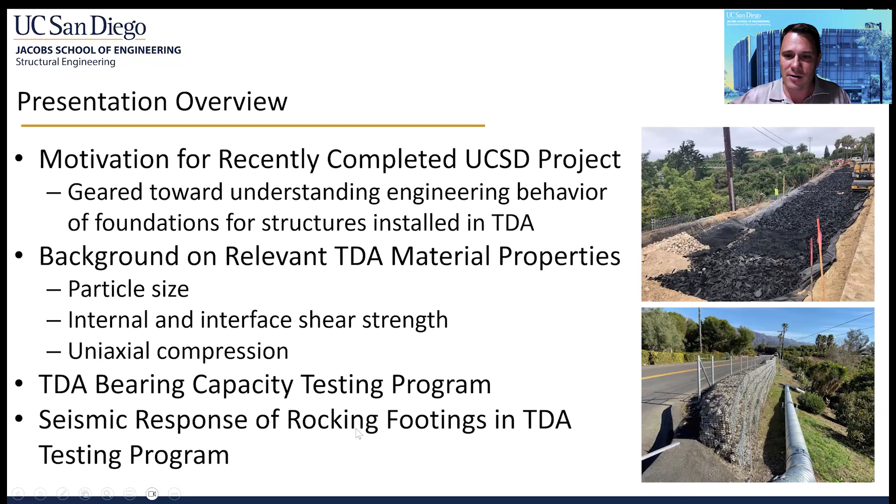I'll talk a little bit about what sort of structures would be installed in the TDA in a second. But before I go through some of the detailed results from our testing program, I'll tell you a little bit about TDA material properties and how we can use those material properties together with some theories to predict the behavior of the foundations. Then I'll go through some details of our bearing capacity testing program - this is basically how much can you load your foundation installed in the TDA - and then a seismic response testing program to understand how a foundation would behave if the ground was shaking below the TDA layer.

So the project had two phases, as I mentioned. The first is where we looked at the load settlement response of footings installed within the TDA. We did 8 different experiments where we changed the width of the concrete footing, the shape of the footing, the angle of our load. But in all of these cases, the foundation is going to push down into the TDA, and at some point it's either going to tilt sideways or reach a capacity value. And then we want to take the measurements that we had from those experiments and compare them with some theories that geotechnical engineers use to predict the bearing capacity of foundations in soils. We want to see if those apply also to TDA.

Our second phase, we wanted to look at the seismic response of the footings in TDA. So this is a very interesting future application.

I think that this has a lot of potential for TDA. TDA is used as a vibration isolation layer in railways right now, but maybe we can also use this as a way to mitigate the effects of earthquakes on structures by providing a low-cost seismic isolation system. We have seismic isolation systems we can buy from companies that cost hundreds of thousands of dollars. So if we're able to use this recycled lightweight TDA, it's very low cost for, as we'll see, almost comparable performance.

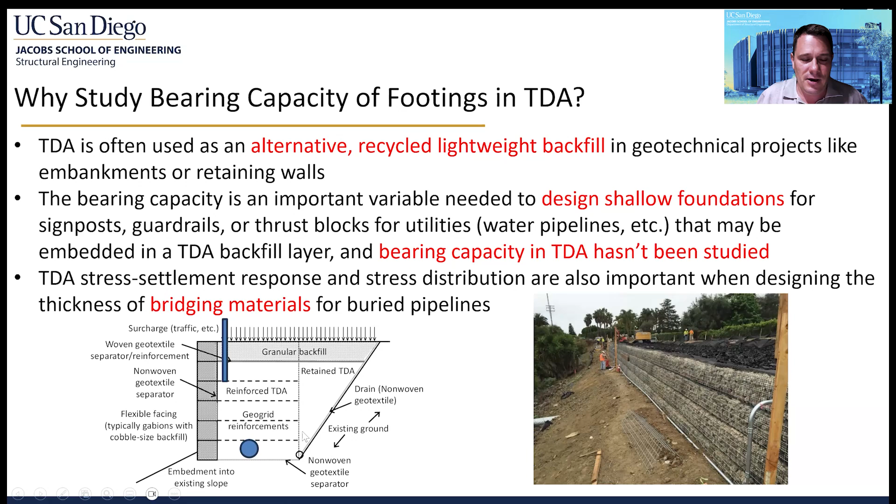Another interesting thing on why we want to study the seismic response of footings in TDA: if we have a shallow footing on soil and we design the footing to be very large so that it would have a very high bearing capacity, one challenge during the earthquake is that the energy could be pushed from the ground into the structure, and you could end up having a failure within the concrete structure.

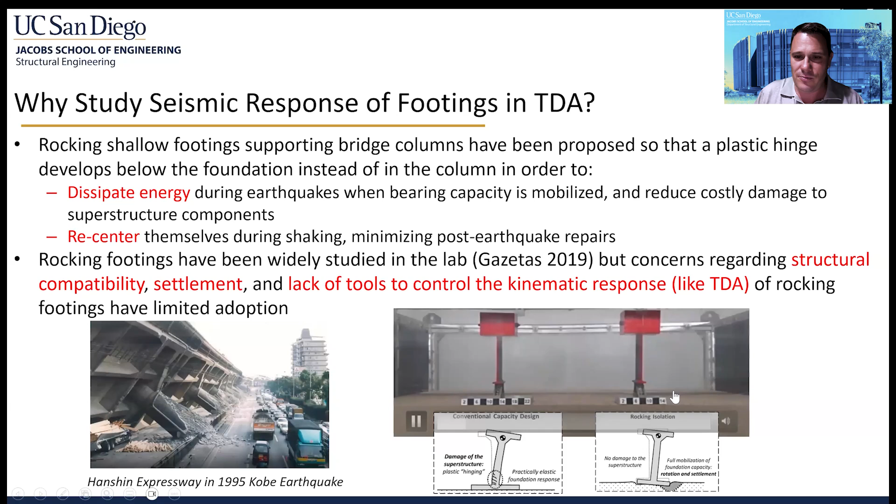So this was something that we wanted to study. People have looked at these rocking foundations on soils, but there are still a lack of tools to control the behavior of these rocking foundations. So if we can use TDA beneath this rocking footing, we may be able to gain even better response than people have seen in the past. I'll show some actual experiments on TDA instead of sand, as you can see here.

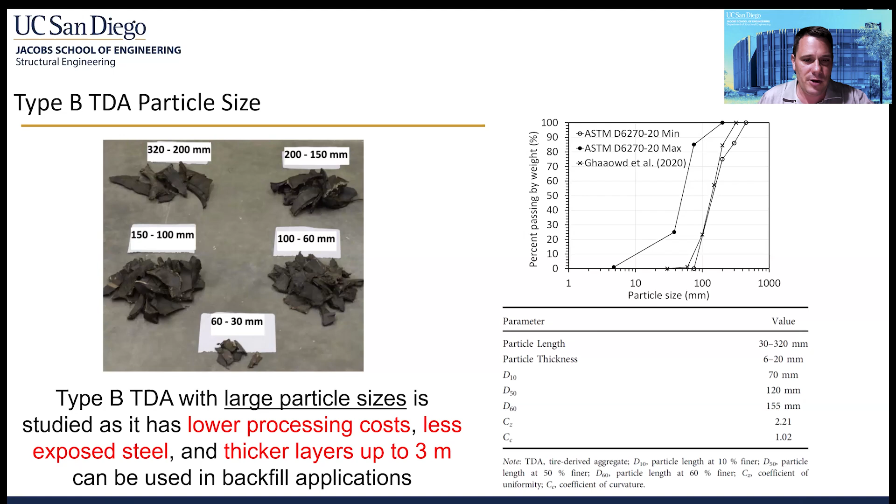Before we go into talking about our experimental program, I wanted to give you a little background on TDA and some of its properties that we've measured in previous projects sponsored by CalRecycle. We're focused on type B TDA, with large particle sizes up to 1 foot in one dimension. This has lower processing cost, less exposed steel, and because of those, you can use thicker layers up to 3 meters, or 10 feet. And that's advantageous in our geotechnical applications.

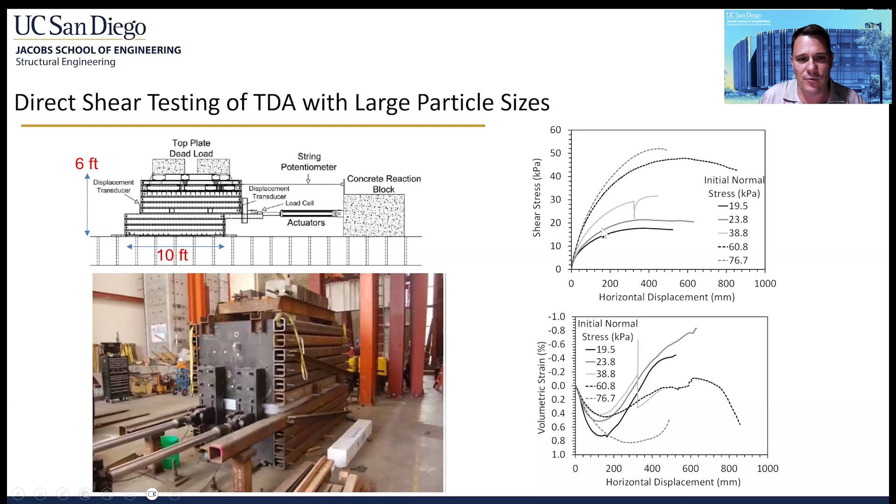Whenever you have big particles, you need to have big testing devices. So one of our early projects was to develop a large direct shear box to measure the shear strength properties. Once we did this, we found that the properties of TDA are very similar to those of soil, but with the main exception that it takes a lot of movement before you reach the strength of the soil. The strength is where this curve reaches its peak. You're almost getting half a meter of displacement before you get to the peak. So there's good things about that. It's a very strong material, but it's very flexible.

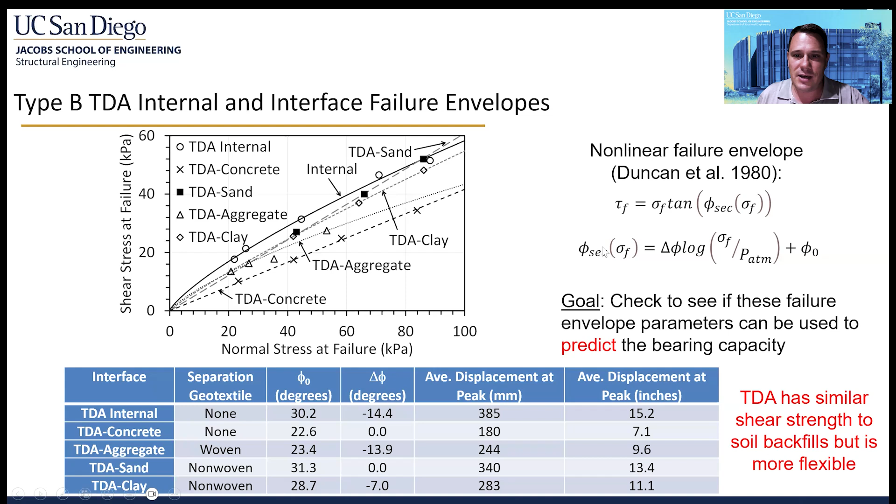These are just some different failure envelopes telling you what the strength at failure is versus how much load is on the TDA. Our goal was to take the parameters of these failure envelopes that we developed in a previous study. It gives us something called the friction angle. And we want to see if we put that friction angle into some predictive designs, is it going to give us the same bearing capacity that we're measuring?

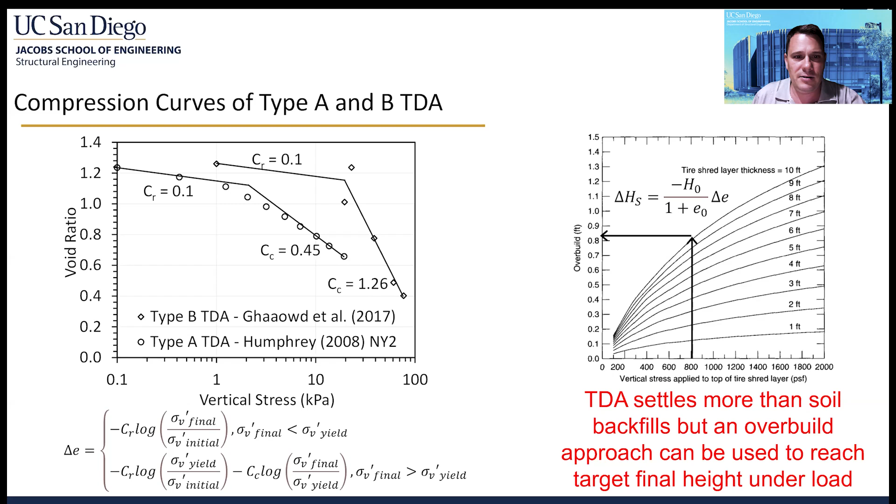Okay, now onto our bearing capacity testing program. We repurposed some large concrete blocks that we had in our lab to create a big box that was basically 10 foot by 18 foot in length.

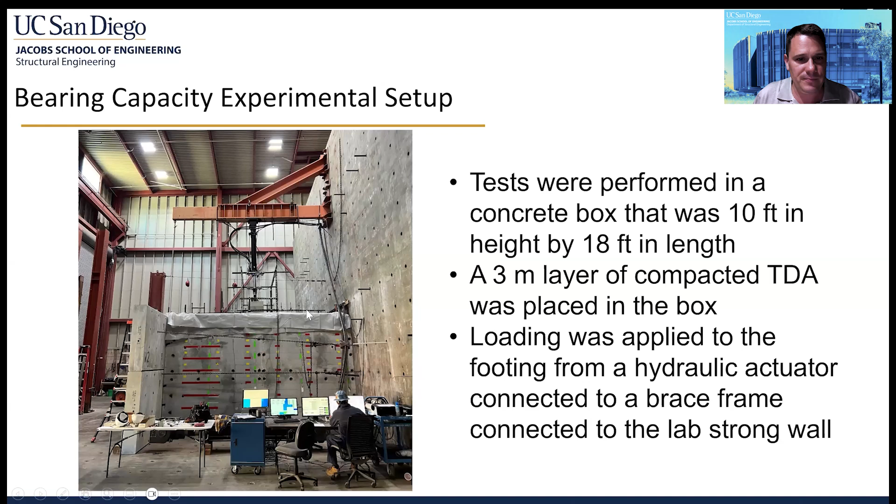And we were able to put 10 feet, or 3 meters, of TDA within that. You can see a person sitting here for scale. And then we had a loading frame, and we could apply loads through a hydraulic actuator to a footing. This is just a picture of the TDA that's been installed into the box, and we used a bobcat to compact it into place. It's not the same as you do in the field, but it's as good as we could get.

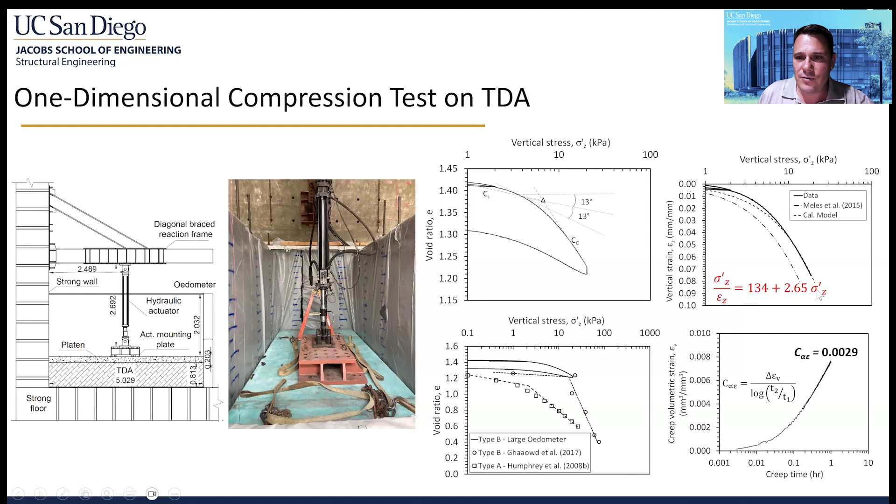We did some early tests before we had all of the TDA needed to fill the box, where we just squished the TDA and made some comparisons with our previous direct shear test measurements, and we saw that we could get a very nice hyperbolic curve to represent the load settlement response.

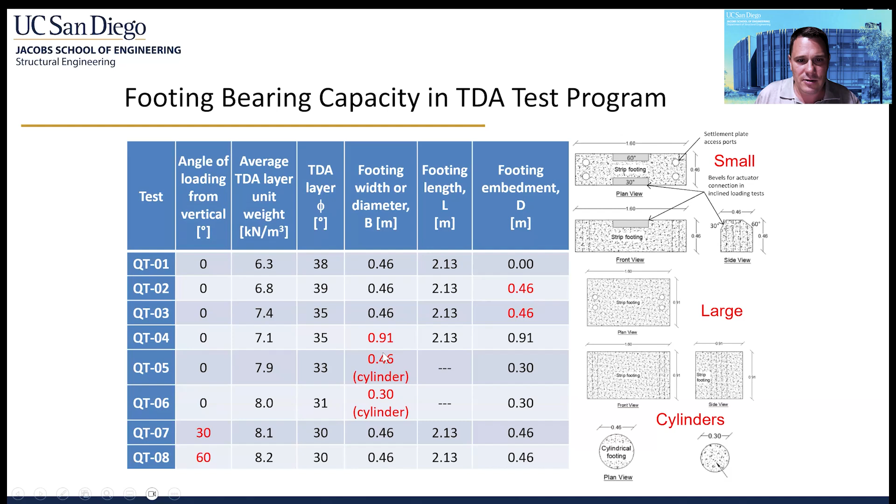Here's a summary of the 8 tests that we did. We varied the embedment depth, the size of the footing, the shape of the footing, and the angle of loading. Those are all different things that you may encounter in different projects.

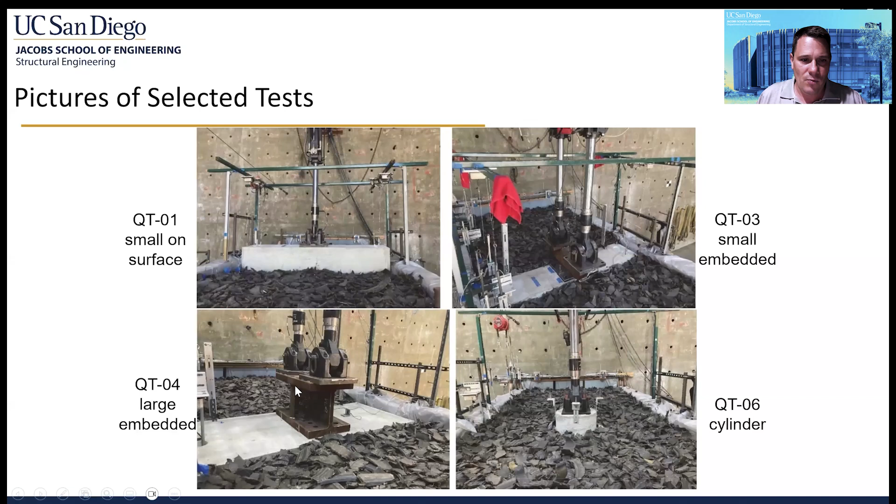These are some different pictures of the different footings. You can see it's a strip footing for most of the cases that we looked at. It was on the surface, it was embedded into the TDA, a wider footing, cylindrical footings that you may encounter for those signposts or guardrails, and then inclined loading, where we applied loads at different angles.

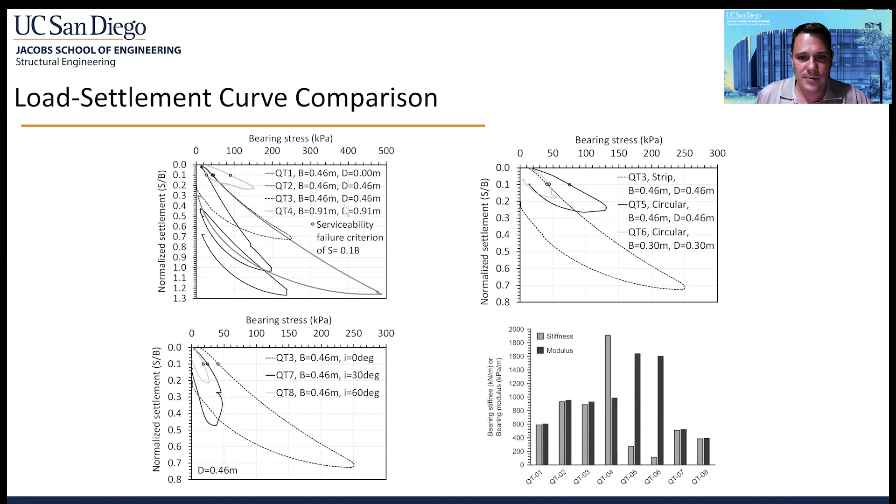So we did reach bearing capacity failure in many of those cases, but it may not be good from an engineering perspective to go all the way out to bearing capacity. We may want to define a settlement criteria, like these dots here, that says we can define failure at the point where you've reached 10% of your footing width. I'll talk about that on the next slide.

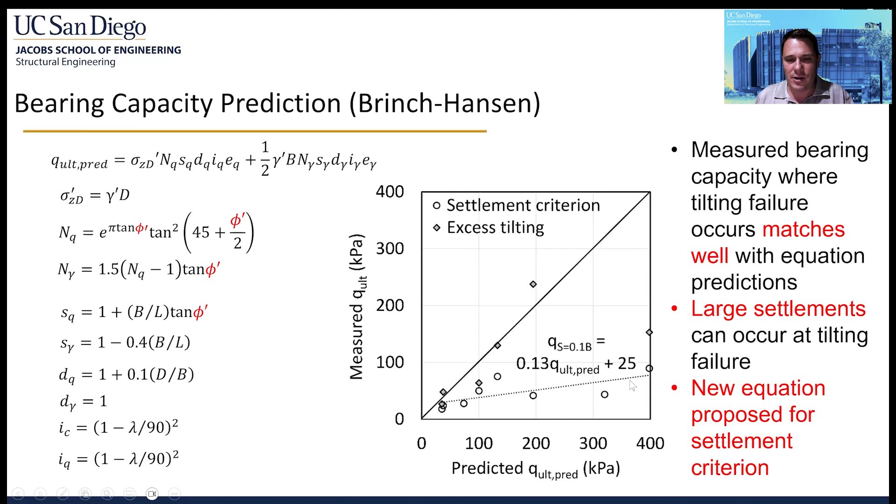So we came up with a new equation that correlated the predicted value with the bearing capacity at 10% of the footing width. And we can use this correlation in design to give us a bearing capacity that is also going to lead to small settlements.

Okay, so that's it on the brief overview of the static bearing capacity tests. Now moving on to the seismic testing that we performed on the footings in TDA.

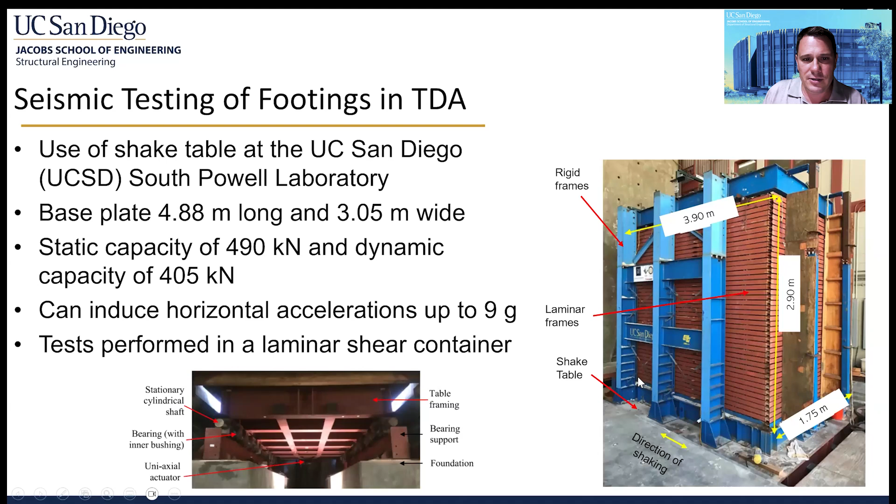We have multiple different shake tables at UCSD. If you're interested to come visit, there's a lot of cool facilities there. We used our medium-sized table in the Powell laboratory that can accommodate this large laminar container. It's about 3 meters tall, about 4 meters long and 1.75 meters wide. We can fill that with TDA to different depths and put a footing into it in a configuration you can see like this.

We did 3 tests with different layer thicknesses and different A over AC values. If you decrease the width of your footing, like I showed in that early video, your area is going to be getting smaller. Depending on the characteristics of your mass, you're going to have a critical ratio at which overturning is expected. So if you look at that ratio, it's basically another way to look at the factor of safety. A smaller value is more dangerous and a larger value is safer. I'm going to show you the results of this bottom test, which had the lowest value of A over AC.

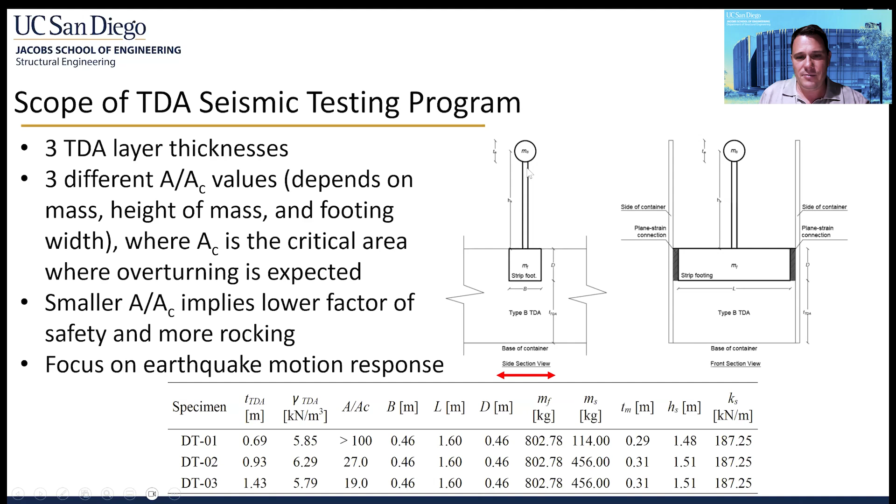And we shake it in this direction, and there's basically a lollipop that is rocking back and forth on top of the TDA layer.

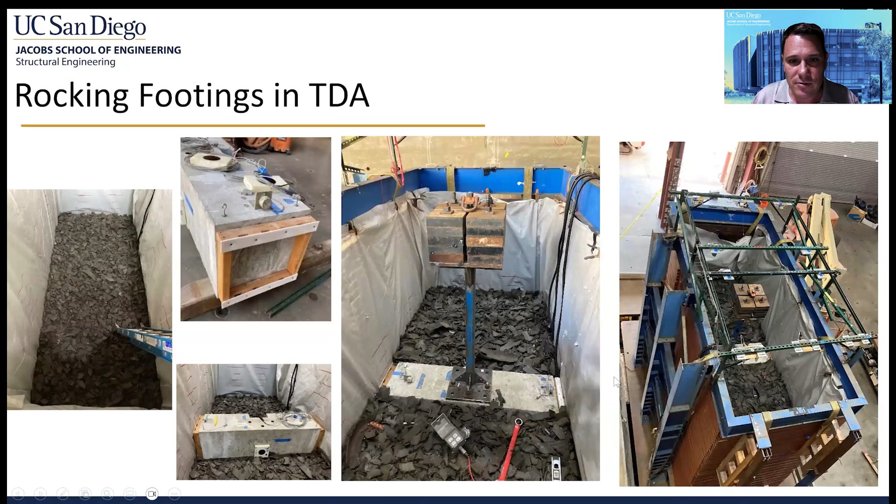So again, we had our container, we filled it with TDA. We had one of the footings from the previous test and put it into the TDA layer and filled it up to the top of the footing, and then had this stack of weights on top representing our structure. I'll show a video on this slide. This may be, hopefully it's not too loud.

The main thing you can notice from that test is that the footing comes back to where it was at the beginning of the test, which is very good. That's an indication of good recentering. You can see that there was not really any more settlement during the shaking event. When we first load TDA, we can expect relatively large amounts of settlement, but after that it's relatively stable, and we don't see a large amount of settlement during shaking.

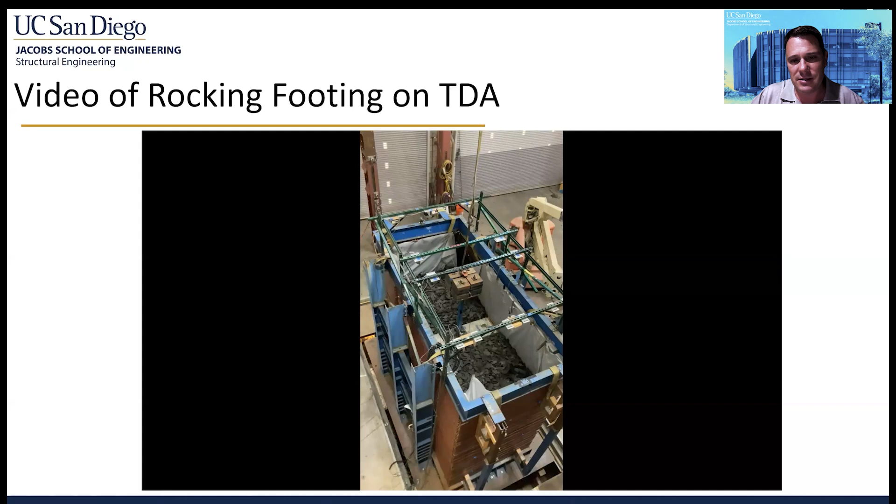Our results also indicate that there's a large amount of energy dissipation. That means the energy from the earthquake is being dissipated in this rocking mechanism, and it's not causing failure within the structure. So that's what's being shown on some of these plots here.

The blue, black, and green are soil rocking foundation tests. The red is our TDA. It has lower amounts of settlement than all of these other cases, although we do have a little bit more rotation, so that's an issue. You saw the mass was moving a little bit more back and forth.

The damping ratios for the system are relatively similar, but there's an increasing trend. So the more rocking that you have, the more energy is being dissipated.

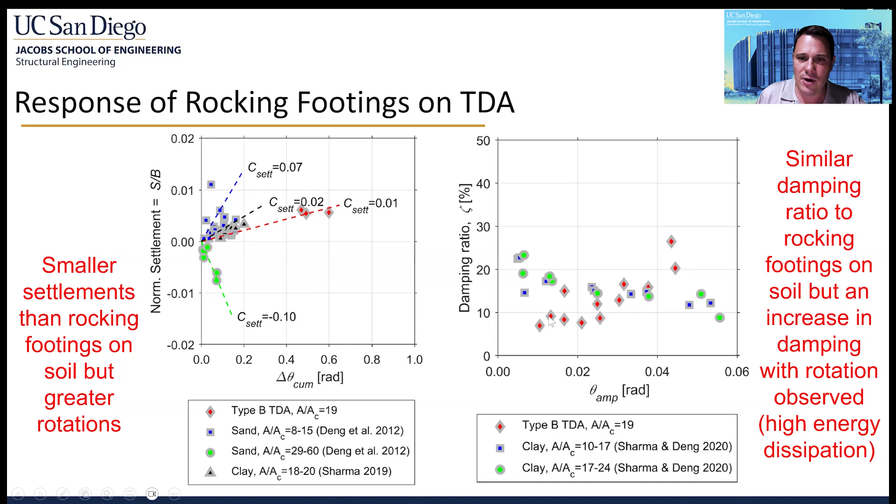We can also look at the loops of stress versus strain and come up with some different ratios. I won't go into a lot of detail here, but the bigger the size of this loop, the more energy is being dissipated, which is good for protecting the overlying superstructure. And we have a recentering metric, which tells you how well you come back to center.

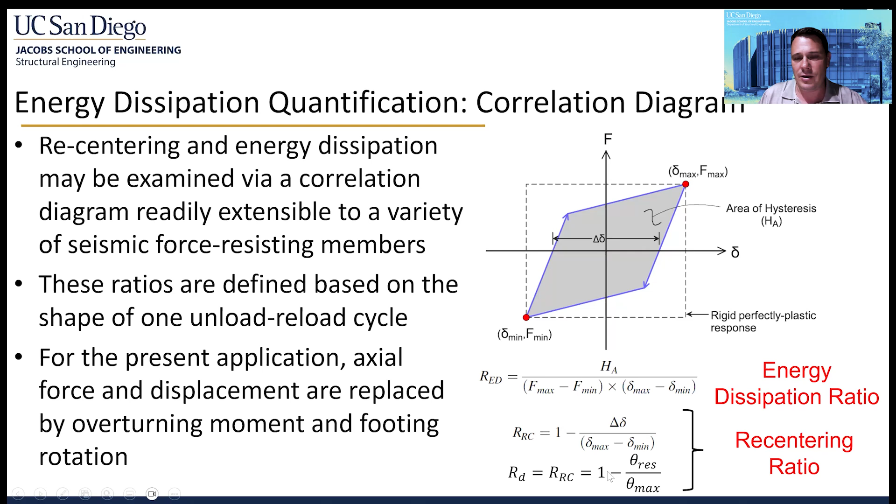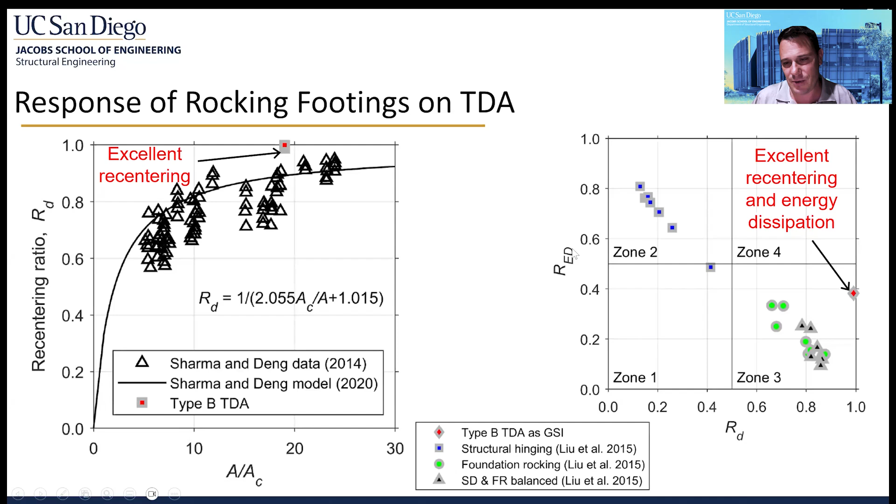One good thing is if we compare these results from soils in the triangle and our TDA in red, we have very, very good recentering, almost perfect. This plot on the right shows that we again have very good recentering, but also pretty good energy dissipation. In soils, you need to have some amount of poor recentering in order to have energy dissipation. But that's not the case in the TDA, which is a very positive sign.

So I have about a minute.

In our bearing capacity tests, we found that there were relatively large settlements by the time we were able to get to our bearing capacity. One nice thing is that we had a good match between our experimental results and our theoretical bearing capacity predictions. The only issue is that large settlements are needed to reach the failure criterion. So we came up with a design equation that can be used so you can know what the bearing capacity is while not having a large amount of settlement.

I think hopefully from that video you can see that TDA has good potential for providing geotechnical seismic isolation, as long as you're able to accommodate the rotations that could potentially happen in the superstructure, or maybe add some additional features into the TDA, such as reinforcement to help control the amount of rotations that you obtain.

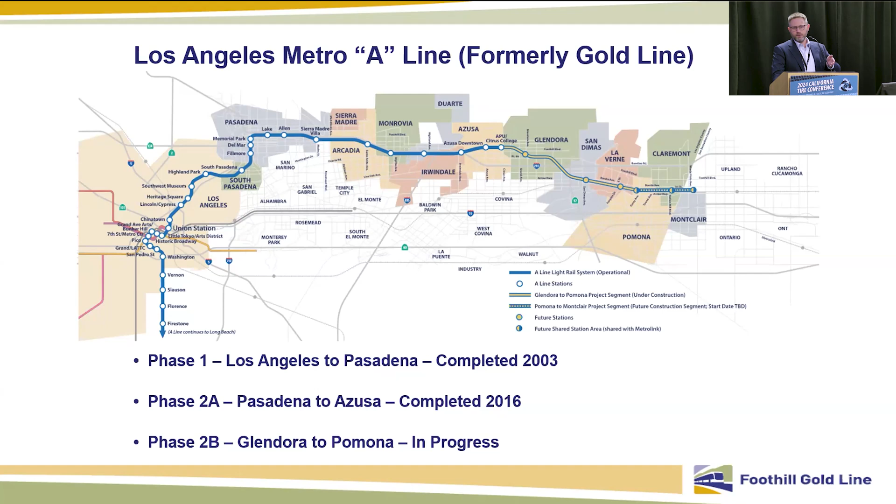I'm the contract manager for the Metro Gold Line Foothill Extension Construction Authority. So what are we? We are a state agency, we're not LA Metro. We are a state agency created under an assembly bill back in 1998 to build what is now the northern leg of the Metro A Line, what at the time was the Metro Gold Line, from Union Station initially to Pasadena. Then under a separate state assembly bill in 2011, the authority's charge was expanded to extend that line. So between 2012 and 2016, we extended the line from its original terminus in Pasadena to the Azusa-Glendora border, and we are currently constructing what we call Phase 2B, from Glendora through San Dimas, La Verne, and Pomona. And we are in the process of securing funding for a further extension from its current planned terminus in Pomona through the remainder of Pomona, Claremont, and then across the county line to Montclair in San Bernardino County. So let me go back here.

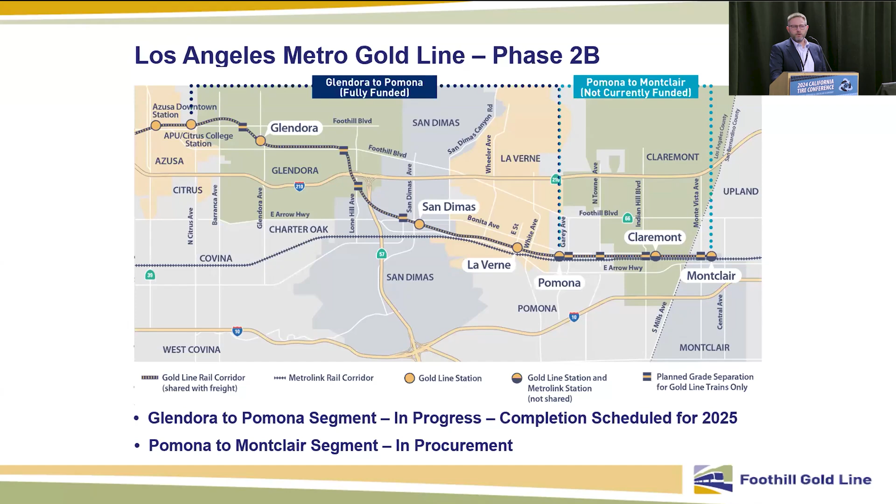So the segment we're currently building, Phase 2B, is about 9.1 miles. It's double-track light rail. We're building on a right-of-way that is occupied by a freight line, so we've moved the freight line from the middle of the right-of-way, either north or south, to the edge of the right-of-way, and in the vacant space we plop 2 light rail tracks. So all of that said and done, we're building just shy of 100,000 track feet of light rail.

During the environmental phase, we identified 28, almost 29,000 track feet, which needed vibration mitigation because we're putting track closer to a sensitive receptor. Most of that is residential and a little bit of commercial space where we'll have increased vibration from trains being closer to them. Of that, there was one area where we have to install a floating slab, which I'll get into in a minute, where we had a vertical and a horizontal curve next to an existing bridge that we do not want to touch. So we have to put in a floating slab for about 200 track feet, which is a big old expensive pain. And the rest of it, we allowed our design-build contractor to choose whether they could install ballast mat or tire-derived aggregate.

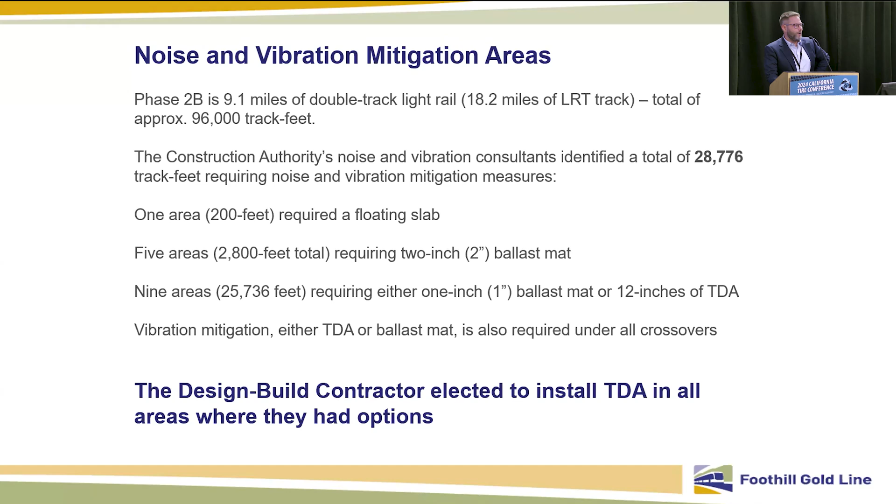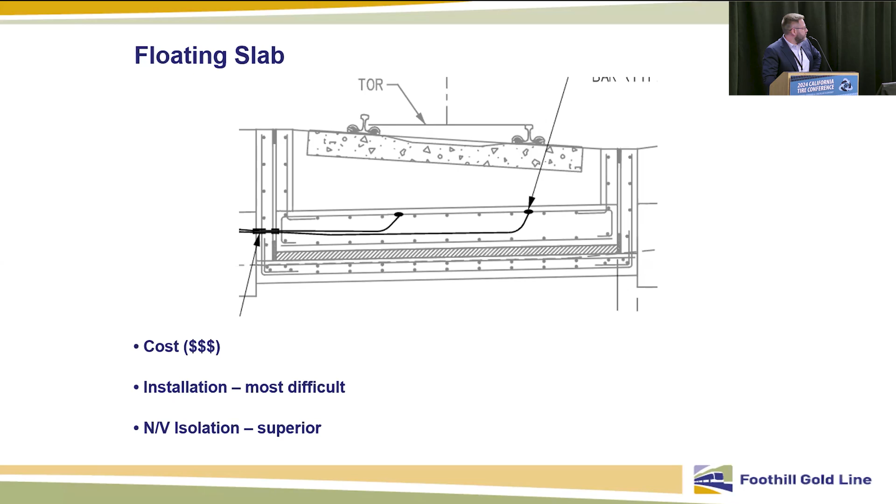So a floating slab—I mentioned this is a big old expensive pain—because what is it? It's really building a trough within a trough. So you have a reinforced concrete trough. I apologize for this graphic, this was the best cross-section I had, but it's a reinforced concrete trough with a layer of vibration attenuation—basically 3 layers of ballast mat—and then another reinforced concrete trough built inside of that, which we then have to put our sub-ballast, ballast, rail, everything on top of. So it's a lot of extra excavation, a lot of steel, a lot of concrete, and we all want to avoid that. It does offer superior noise and vibration mitigation, but it's about somewhere between 10 and 14 times as expensive to build as it is to install just a ballast mat.

Ballast mat is a rubberized polymer mat we place under our sub-ballast, and the material itself is more expensive than TDA. It requires less labor to install on the surface. You buy these mats, you roll them out, but it is delicate.

Generally we are placing between 20 and 25 feet of width underneath our tracks, per track. So you have several layers of this ballast mat you have to roll out, and until you get your sub-ballast placed on top of it, it can tear, it can shift.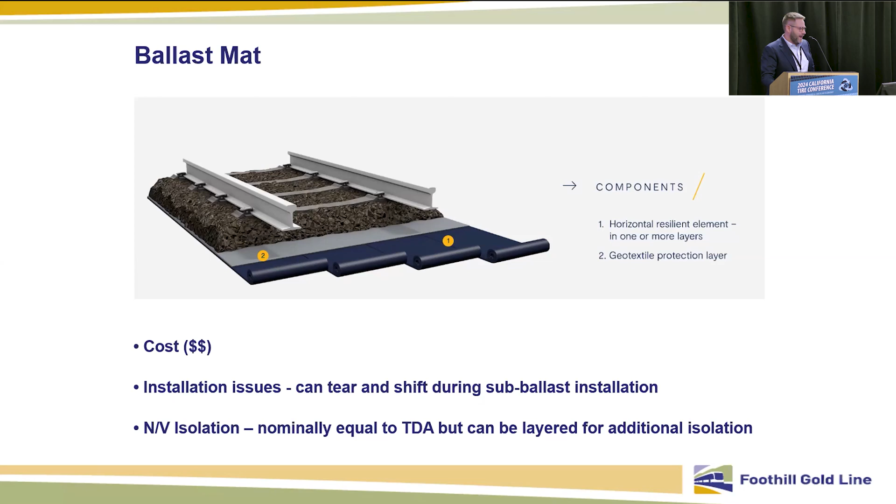If your contractor's crews are not careful, you have to basically rip everything up and start over again. That is one of the main reasons our contractor chose to install TDA, which, again, for a horizontal project like we're building, is about the perfect use case for tire-derived aggregate.

You can see this cross-section. It's basically this blue highlighted area right on top of our subgrade, below our sub-ballast. So we do a little bit of extra excavation, put down a layer of geosynthetic fabric, roll your TDA out, wrap it up like a burrito, and proceed with your construction.

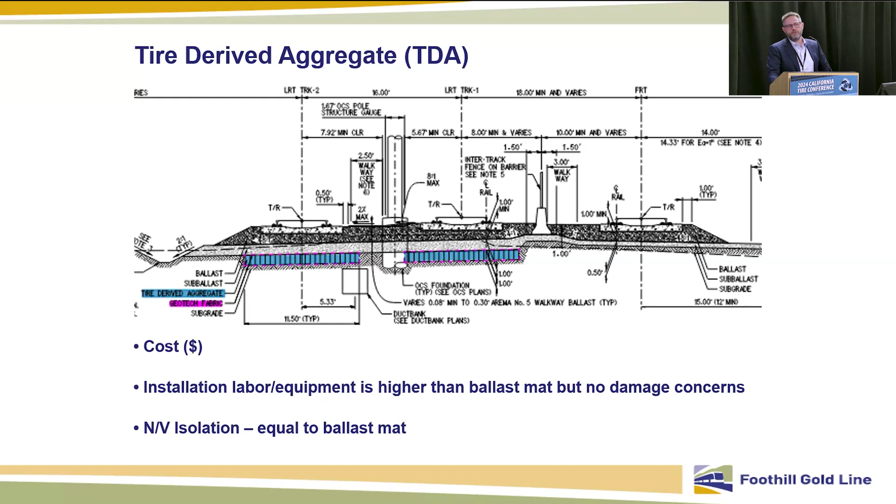We'll get into this in a moment. The noise and vibration isolation potential of this cross-section is nominally equal to a 1-inch layer of ballast mat.

So how does this look in practice? Luckily for us, our contractor's done this before. We've done this before, on our Phase 2A, the Pasadena to Azusa phase. So the agency had practice with installation, and the contractor had practice with installation.

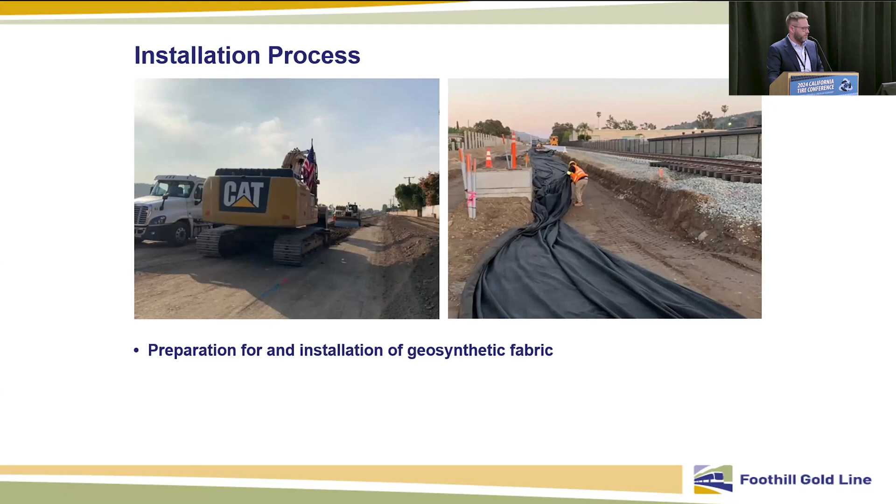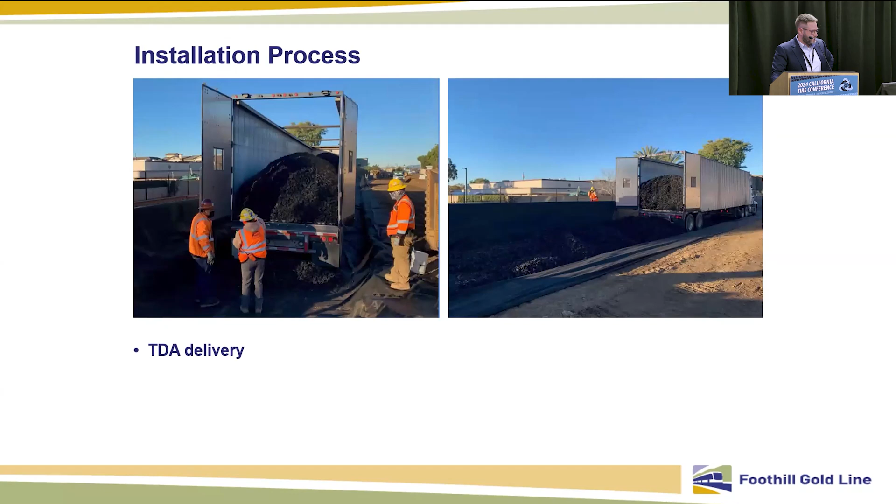We go in and, as they're excavating, basically excavate slightly deeper, dig a trench out. You can see here the second photo, installation of the geofabric. And you bring your trucks in, drive them right through your trench, open them up, dump your TDA out, pull it out, consolidate by rolling half a dozen times.

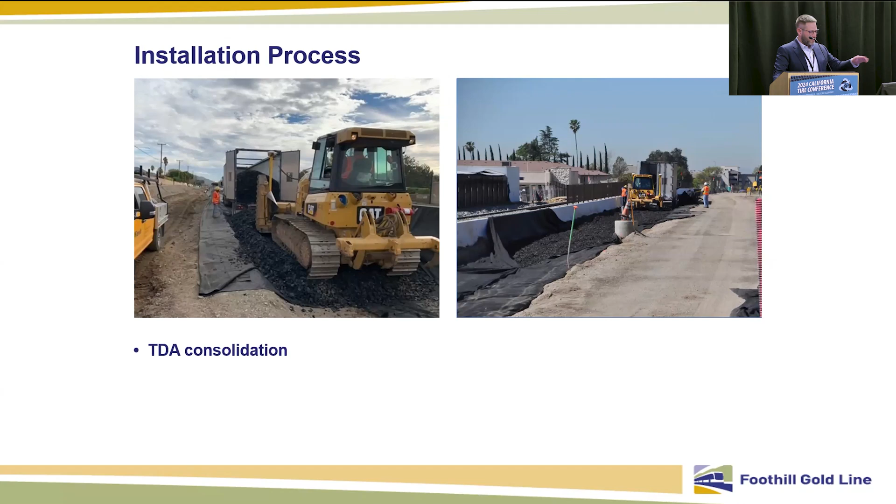I think our contractor always threw a seventh roll in there for good luck. Just roll over it, consolidate your TDA. As they're pushing it along, you get your good layer in there. You can see in the second picture that once it's in, you're not going to do too much with it.

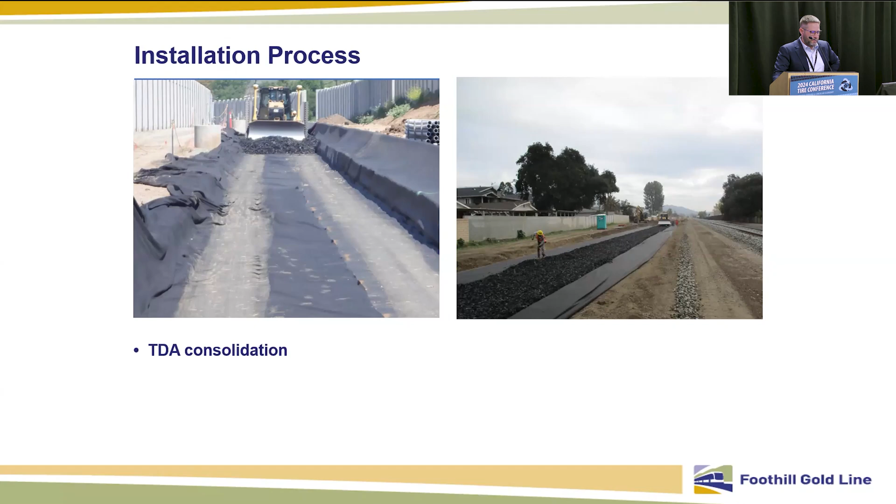We're using Type A TDA, which is a smaller particle size than Dr. McCartney was using in his research. It's nominally about 200 millimeters as the largest diameter, or largest dimension, of your TDA, Type A. So once it's consolidated, it's really not going anywhere.

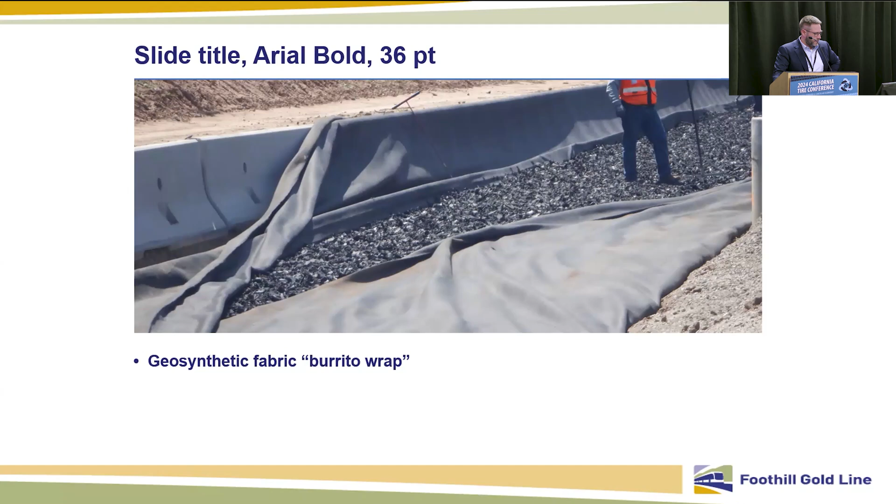It's just placed, wrapped up just like a burrito, and then we install sub-ballast right over top. You can never tell it was there, and once your sub-ballast is in, it's pretty much bulletproof there. Even before you have the sub-ballast in, other than tearing your geofabric, there's no real installation issues.

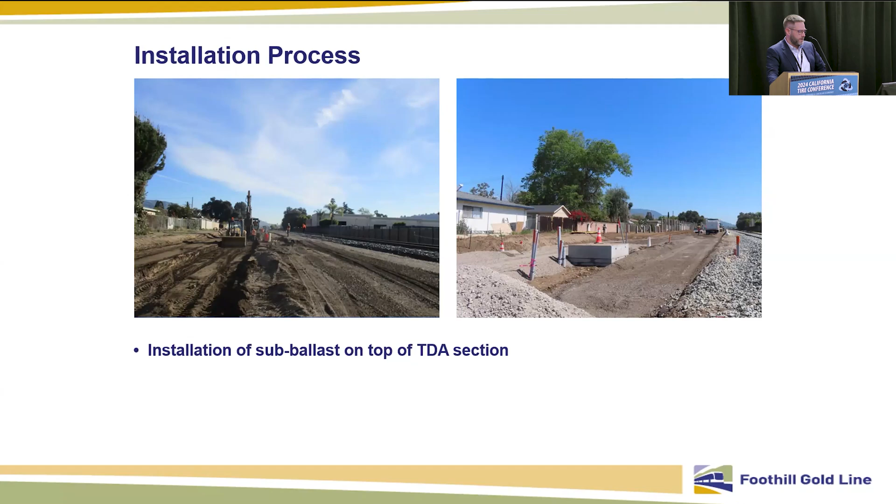So our contractor likes it. We heard very positive feedback during industry review when we were in procurement for this contract back in 2018. When we did our industry review panels, we asked the contracting community if they would like to use it, because we like to tout it as a big sustainability feature of what we're doing. So, very positive feedback - our contractor used it everywhere they could.

So like I said, it's a pretty good use case. We were able to - the contractor likes it because they can work very efficiently. That operation I walked you through is about two shifts to get it installed, consolidated, wrapped, and get sub-ballast laid. So it overall amounts to about an extra 10 to 12 crew hours to install.

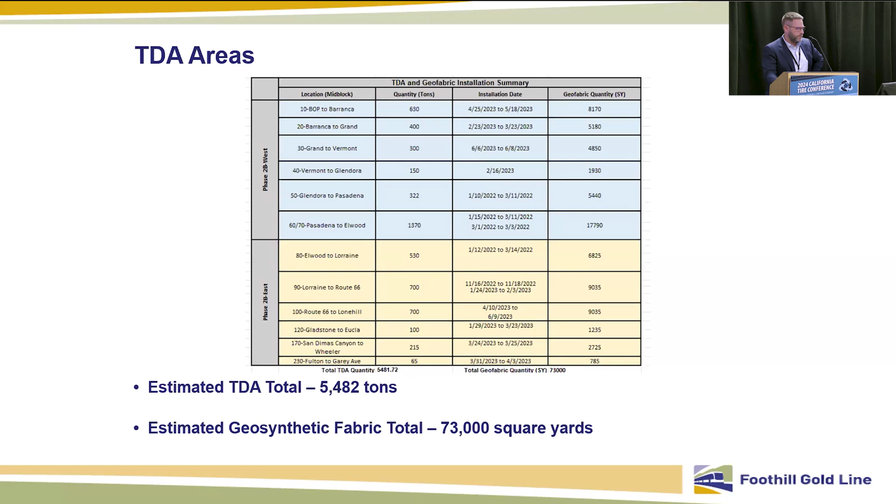So we've had great success with it. It's something that we'll continue as we go into our next phase of procurement to look into, allowing it everywhere we can. So that is the end of my presentation. I'll be around for any questions later. Thank you.

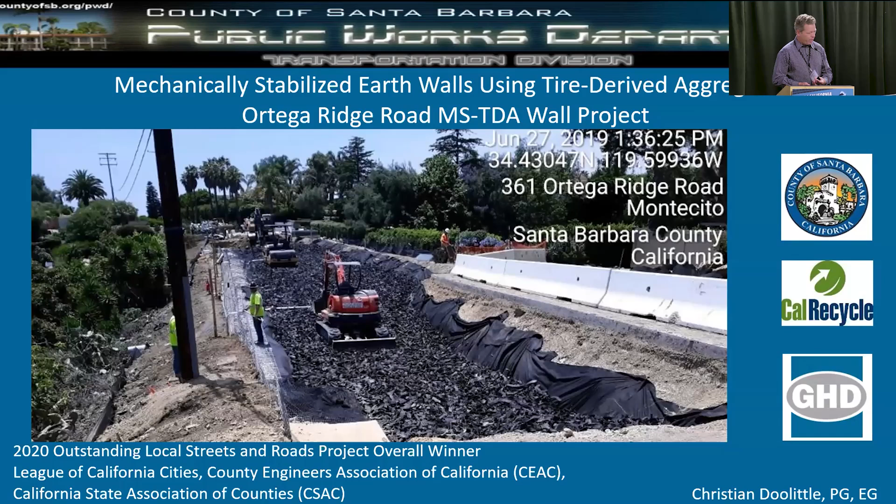So what is an MSTDA wall, right? It is basically the same thing as a mechanically stabilized earth wall, which is basically using geosynthetic elements and a retention element on the face in order to retain a large embankment. In this case, we are just substituting out the earth component for the TDA.

And why we use the TDA was primarily because of the abilities that it does generate, which is it's a lightweight fill. Now, there are other lightweight fills out there that you can utilize, but this TDA is substantially less costly than the other alternatives that we would potentially use in this case.

So MSE wall, we just talked about that as basically a geosynthetic reinforcement within the wall. In this case, we use two different types of geosynthetics for the stability of the wall, which is uniaxial, which is providing basically one-directional force resistance and tensile strength. And then we use the biaxial geogrid more for overall stability and settlement mitigation as we get more towards the surface of this installation.

As you see here on the bottom, TDA, we use type B TDA, which is the larger lengths, 4 to 12 inch typically is what we would see there. But yes, it's a low density material. It's got great permeability because it has so much air voids within it. It has a high friction value, so once it has force applied to it, it has a high friction value for movement, and it's lower cost.

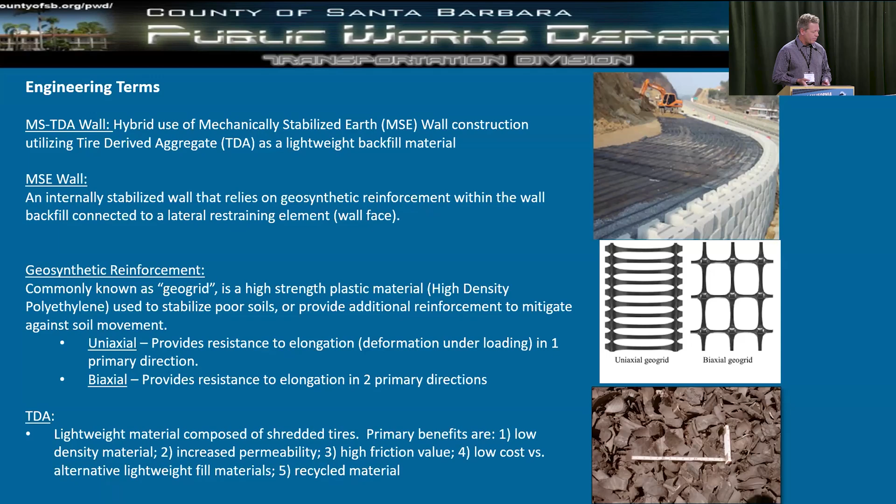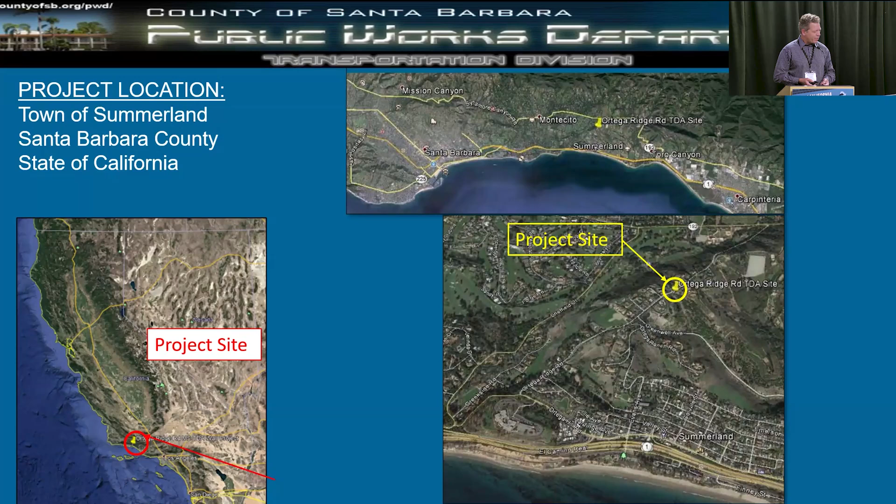A little bit about the project site here. This was in the town of Summerland, which is in the county of Santa Barbara, and it's right along the coast. As you can see here, the area of Summerland itself is sort of like a ridge amongst all the remainder valleys. So it's sort of a high point geographic feature, and we'll go into a little bit more about the site in the next photo, but just generally kind of getting you located in the state of California for us.

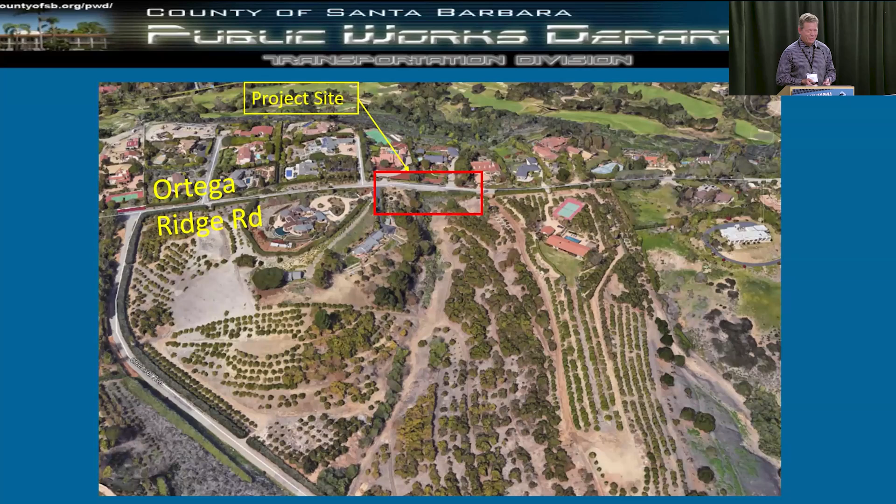This is an overall picture of the project site. As you can see, there's sort of a developed drainage on both sides. So this was like a notch in the ridge line, and it's a normal drainage area. Surrounding farmlands and residential street, it's sort of a cutover roadway from Montecito to the backside of Summerland. We wouldn't consider it a high capacity roadway, but we'll get into its uses in just a little bit.

A little bit about the history of this site. I am an engineering geologist, so we are going to see an engineering geologic map in a second. This roadway was originally constructed in the 50s. At that time, they basically were trying to fill in that notch in the natural drainage. So they ended up bringing in about 23 feet of fill, just locally generated materials from the 50s, just cut fill, and put it in the hole and brought it up.

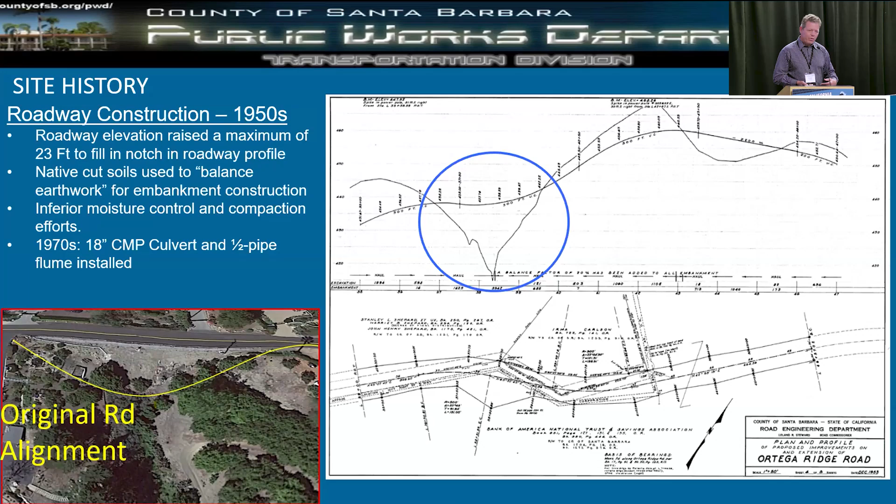So here's the map. I'll tell you a little bit about the soils here. The soils used were locally generated, and it's the Rincon Shale. Rincon Shale is a very problematic soil. It's highly expansive material, which means when it gets wet, it expands up quite a bit, and then as the dry season comes every summer, it will contract. That leads to differential settlement of the soil.

So what that means on the roadway surface is you're going to get this creep. The embankment and all the support soils are basically creeping every summer. They raise up and then creep down with gravity. So we ended up having a lot of issues at this particular site.

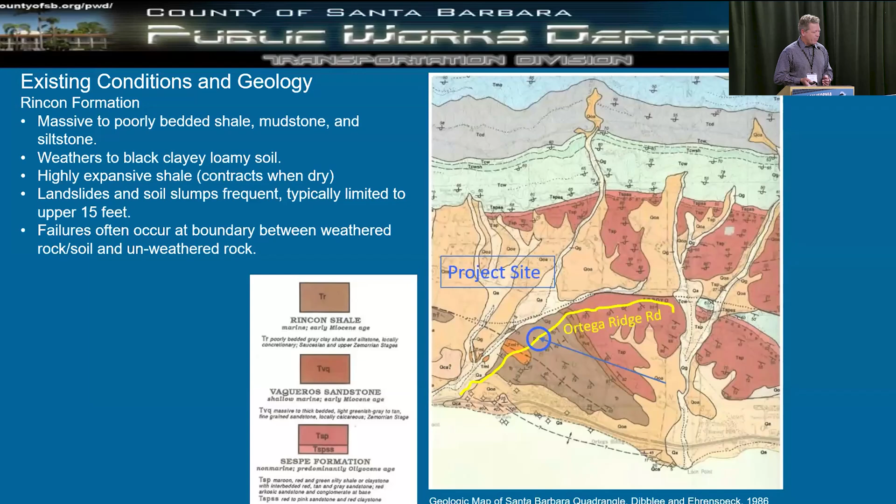So what this ends up doing is maintenance crews have to go out there and deal with this all the time. So what do they do? They just put on another layer of asphalt, trying to smooth the road out for the traveling public. When we were out there investigating, we found over 30 inches of asphalt at the edge of this roadway. They've been doing this for a long time, just continuing.

So every layer of asphalt they put on there is more weight that is going down and compressing these soils every time. It's just a repeating cycle, getting worse and worse and worse.

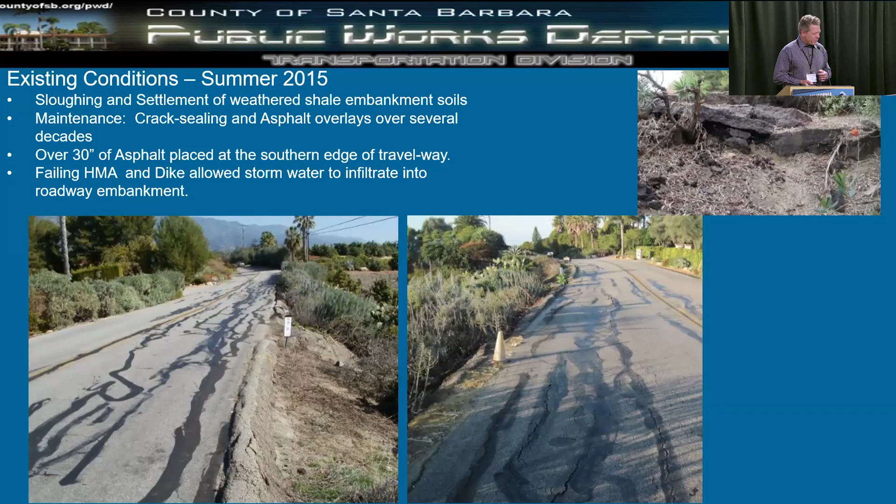So in November of 2015, it finally reached a breaking point. It was getting so bad that there was massive differential settlement. We had like 4 inches of settlement within the travel lane. It wasn't like a landslide, just a massive event, it was continuing to devolve. By November 2015 it got so bad that people were understandably concerned.

So we went out there as a stopgap measure to basically create new shoulder width and move part of the roadway over. Then we had to close off the lane because everybody thought it was going to just collapse, or that it was going to create another driving hazard. So we went through that towards the end of 2015, and then we got serious about doing a permanent repair.

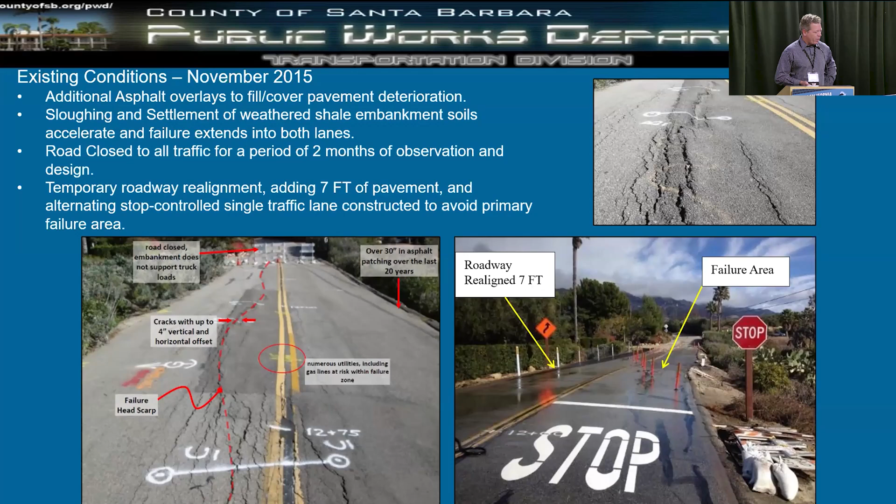So in working with CalRecycle and GHD, they supplied us some good technical knowledge on new techniques that were being used throughout the country, but hadn't yet been used in California, which is this MS-TDA wall. So we went through a geotechnical investigation and design.

I won't get into too many details, but one of the things we want to highlight is the existing conditions out there: this material, this Rincon Shale, was basically oversaturated. It was not very well compacted, only 78 to 84% compaction, where normally we'd be seeing 90 to 95% underneath there, and it retained a lot of moisture.

The existing soils were 25 to 39% moisture content, which basically turned it into a real pliable and compressible material. Due to the high void ratios in there from this action, it was just anticipated that this settlement was going to continue or even get worse over time.

The initial recommendations, as they always are, were to just over-excavate 3 feet down, try to put in some superficial reinforcement, and then repave the road.

But we went forward with this, and we did some modeling using information supplied through laboratory testing programs that have been in place with CalRecycle and some universities to develop this technique. So we have some geotechnical data, and we can just put it right into a normal slope stability model like we would for a soil.

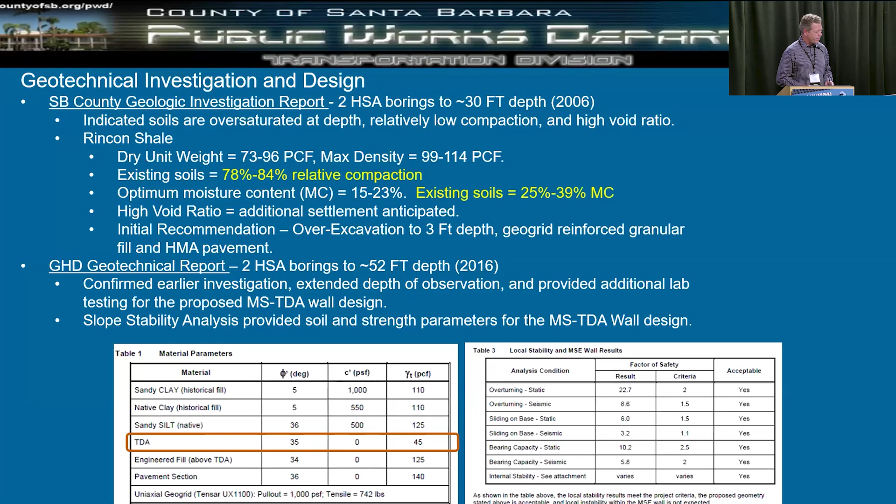So that's what we're seeing here, we are just modeling the TDA as if it's a soil component. We give it a friction angle, a density, and then utilize it in a normal slope stability analysis. For these things, we need to get a long-term static factor of safety of 1.5, which we were able to meet here, as well as the pseudostatic factor for the earthquake case. It's able to meet that through this modeling. What you'll see here is that there's a lot of reinforcement in here, geosynthetic reinforcement.

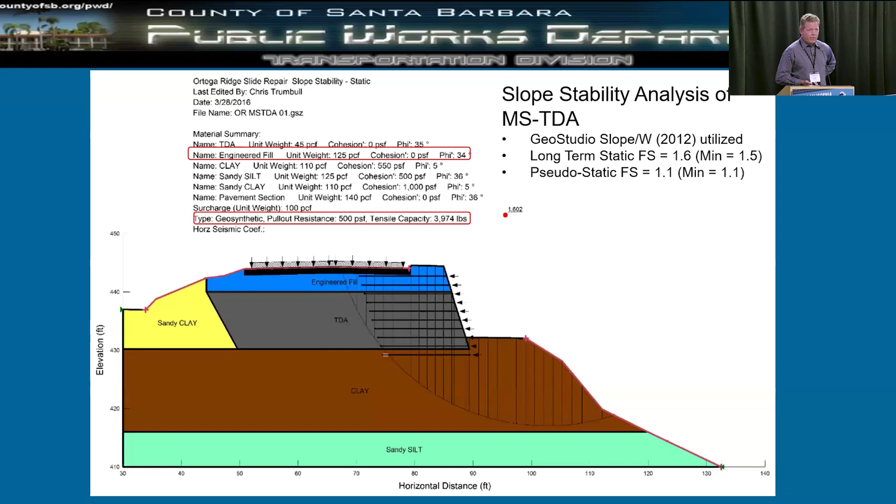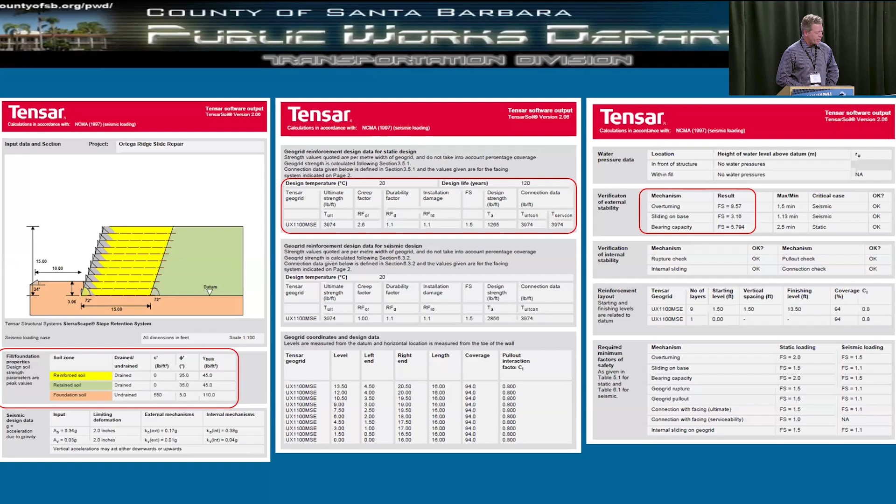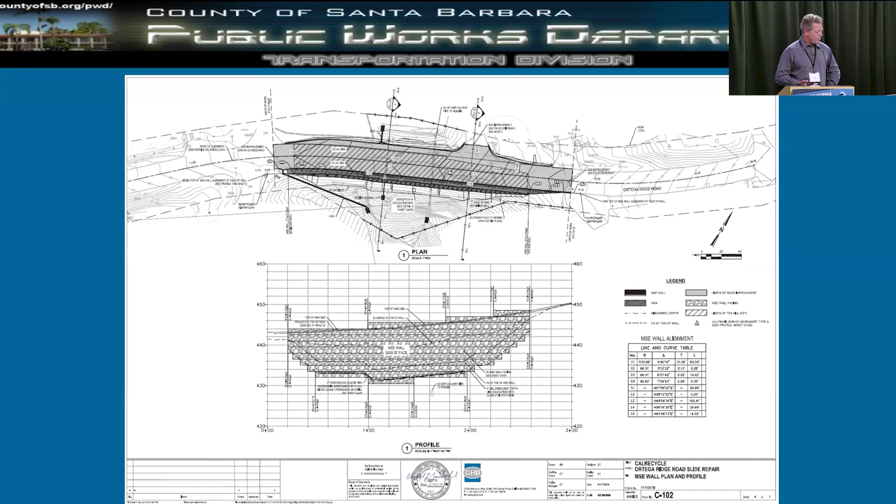I'll try to skip through these, but just want to let you know that this is something you can replicate and model, using available data to do the same work as a traditional geotechnical investigation and design. Eventually we came up with a pretty hefty design that was going to go down significantly deep in order to replace enough material to get below the area of disturbance, but also generate a deep enough and wide enough area that we could use a substantial amount of TDA, making it a more cost-beneficial analysis and utilize this tire-derived aggregate.

In terms of the actual design, when we excavate down, we brought in some engineering fill at the bottom to stabilize it, then brought in geosynthetics - a burrito wrap, as we've heard before - which keeps the rest of the soil out of the TDA zone. We had a pretty substantial TDA zone, about 9 to 12 feet thick. You can see the retention elements on the side - this is a welded wire basket retaining wall system - and then the geosynthetics with the uniaxial grid moving into the TDA.

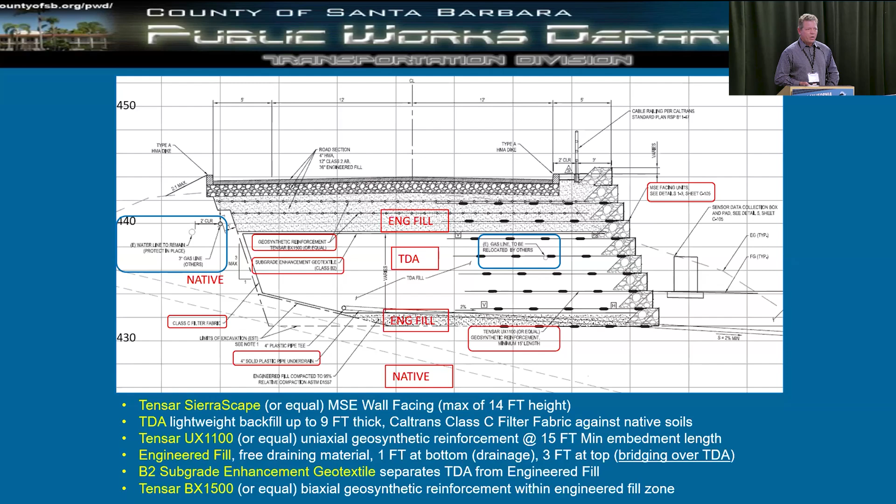I'll get into construction photos in a second, but we got this all ready to go in late 2017, and we were just about to advertise this project in early 2018 when we had a monumental event in Santa Barbara County - the Thomas Fire debris flow, January 9th, which devastated the whole area around Summerland, Montecito, Carpinteria, and beyond. It was a pretty monumental event.

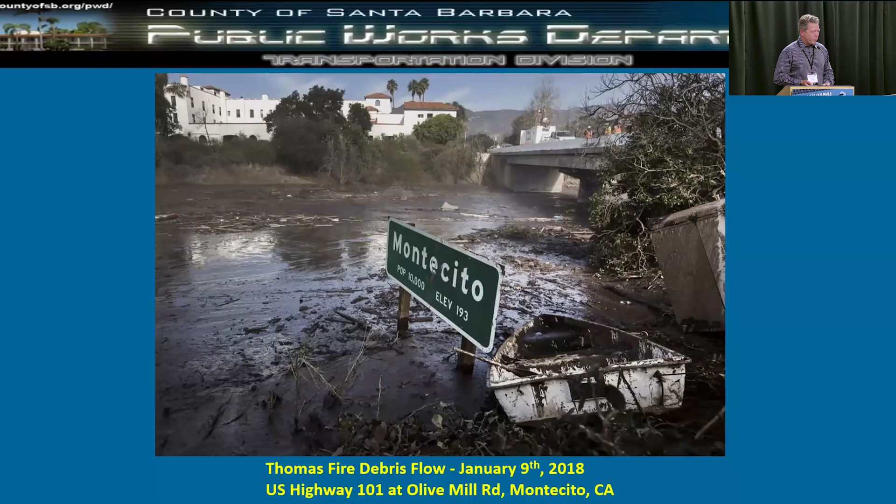This road, now down to one lane, ended up being the only road able to transmit traffic, especially for large hauling of debris out of our debris basins - millions of truckloads worth of debris that had to be transported out. We had to keep this open in suboptimal conditions until all the debris could be removed, because it was really the only road able to access these back sections of Montecito.

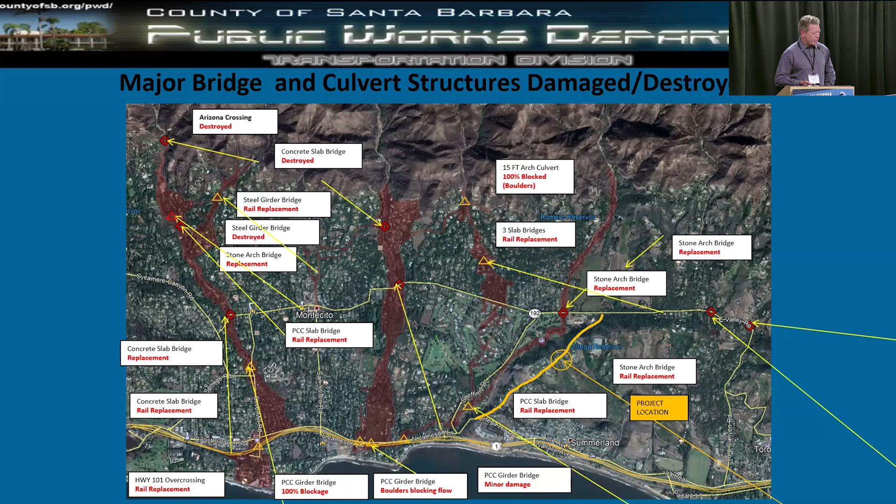Finally the last debris basin was cleaned out, and we were given the green light to go forward with our project. So we advertised it and got some bids - we actually had quite a bit of interest in this project. A lot of them were maybe hesitant about the use of TDA, since they'd never worked with it before, but we just kept assuring them: treat it like dirt. There's a couple things that are different, but it's a material - use it, and we'll move forward.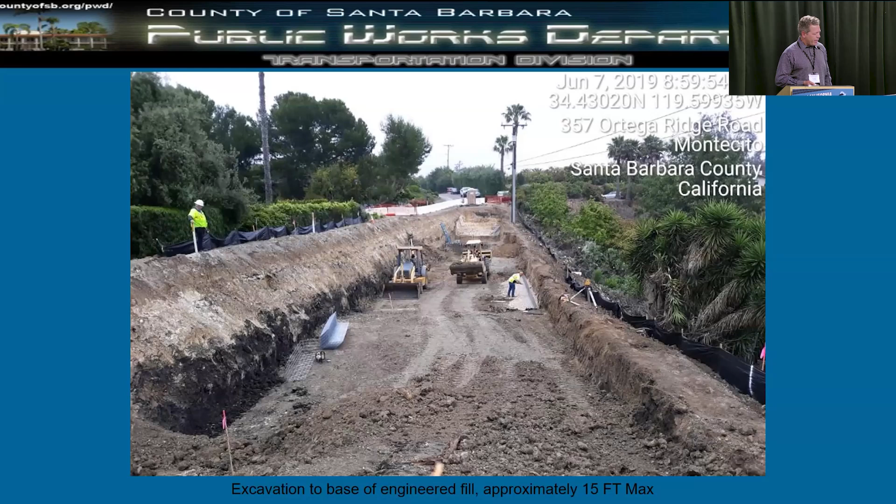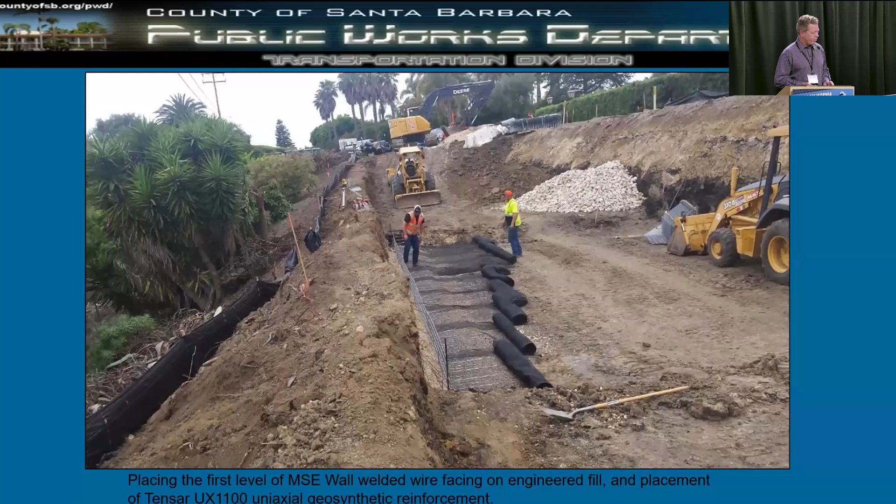As we go forward, we're just going to go right through the construction sequence so you can see how this is utilized. This is the first layer of the MSE wall, which is the welded wire facing being placed on the engineered fill prior to the placement of the TDA sequence.

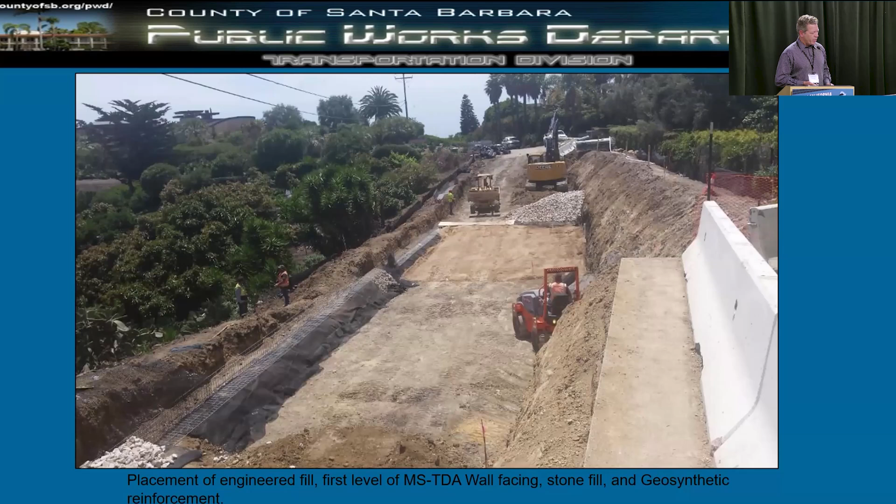And here we are, they're starting to roll out the fabric for the TDA to go on, and you can see some of the geogrid there on the left side. That's the connection to the retaining wall. And then finally, it was time for the TDA to arrive.

These TDAs arrive in massive trucks with moving beds. Areas and access are an issue, but eventually what every contractor wants is to have it delivered right to the site for quickest access. That can be problematic sometimes because these are big vehicles, so we leave it up to the contractor to figure out how to do this, and they try several different methods until they figure it out.

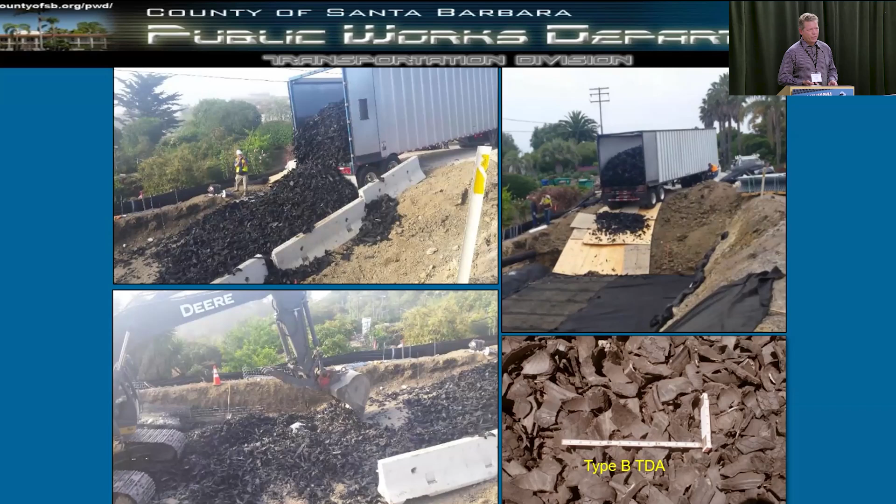In this case, we want to mention that separation of the materials is key. You don't want to just mix this all in with the rest of your soils or other construction materials, but eventually we can get it all in the right space.

So here we go when they actually have the TDA, they bring it in basically in 18-inch lifts usually, and then we compact it. It's a method compaction system, so you just go over it with steel equipment, either a steel tracked dozer or a steel roller, and roll over it basically 6 passes total, 3 in each direction with this material.

Rubber tires are definitely not a good thing to have on your equipment. You have to have steel tracked equipment because the steel strands in the TDA will really foul up the equipment. Rubber tired equipment will pop the tires and everything else. There are some issues with the contractor learning how to work with it and use the right equipment, but once they get it, they just use it as a normal material.

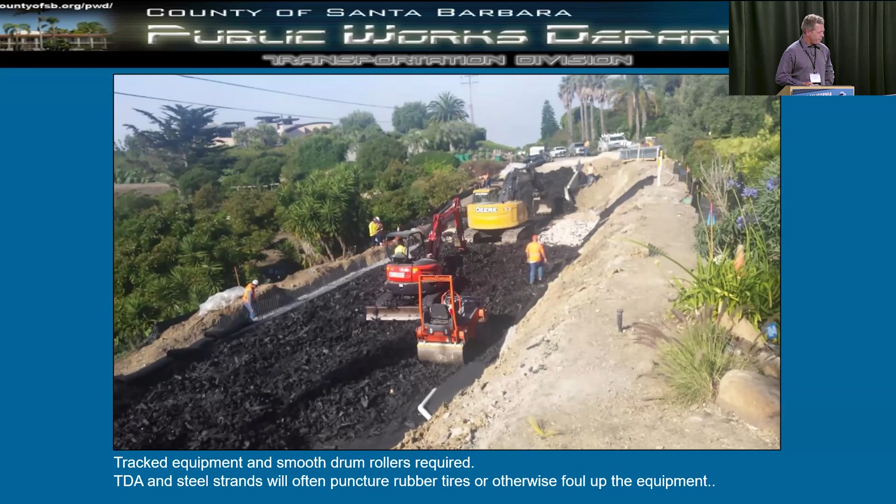As we're getting close to the wall face, you have to use lighter equipment, so we have mini excavators and mini rollers to work within 5 feet of the retaining surface so you don't overload those systems before they're all tied together.

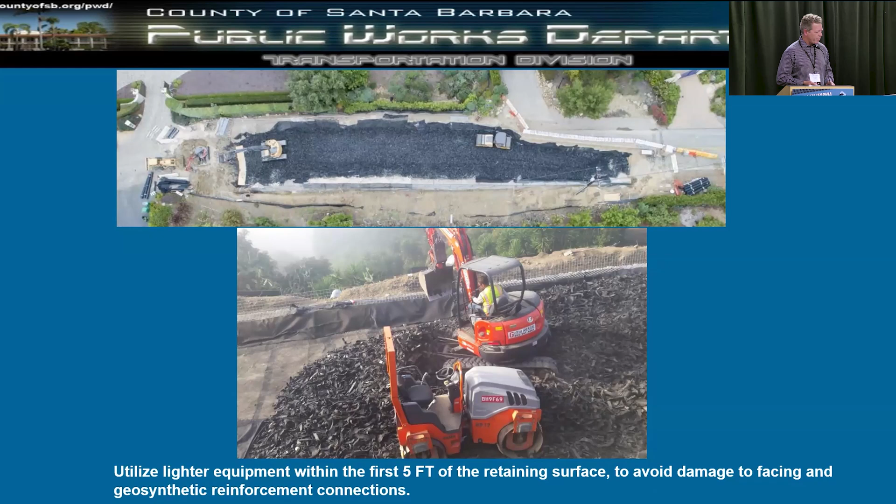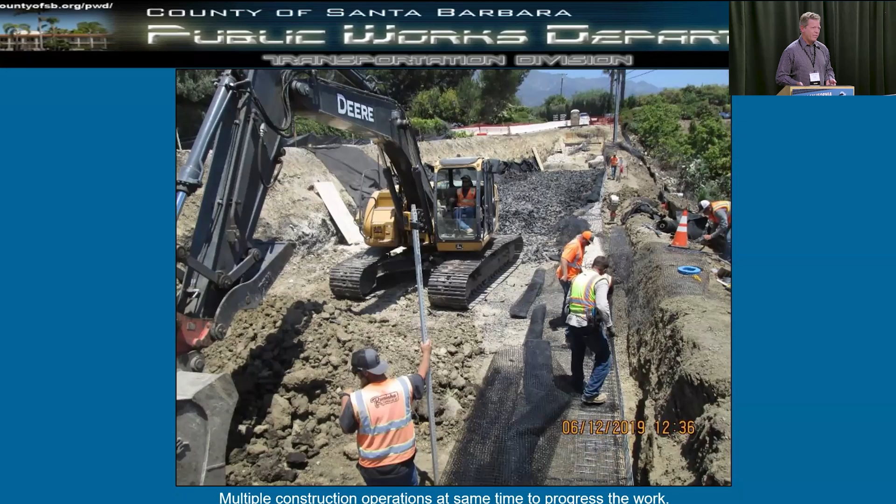Once construction starts on a project like this, there's multiple operations going on at the same time because you have multiple materials that need to be utilized. You have your welded wire people pulling that together, you're bringing in rock to backfill the gabions or welded wire, and then you have the TDA coming in at the same time, plus your geosynthetics. All of this is coordinated, and the contractor's trying to figure it out at the same time.

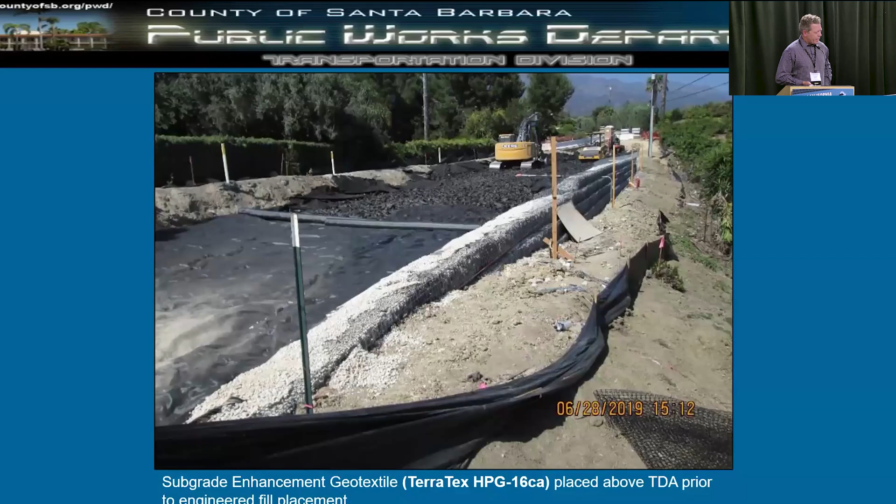But eventually we get to the top. This is the top of the TDA, and we start rolling out the geotextile, which is the separation. From that point, we can start really moving.

In this case, we're continuing the welded wire facing all the way up beyond the embankment slope, bringing in that material and continuing to progress the work.

We did use a substantial amount of material on top of the TDA. In this case, we used about 3 feet of engineered fill, reinforced by the biaxial geogrid. Then we got into our structure section above that, which was about 1.5 feet thick. So we put a lot of extra weight on there.

We did talk about there being a lot of settlement to this. So in some ways, having more fill operations allows more time for those materials to settle as you're continuing to construct and bring it up the slope.

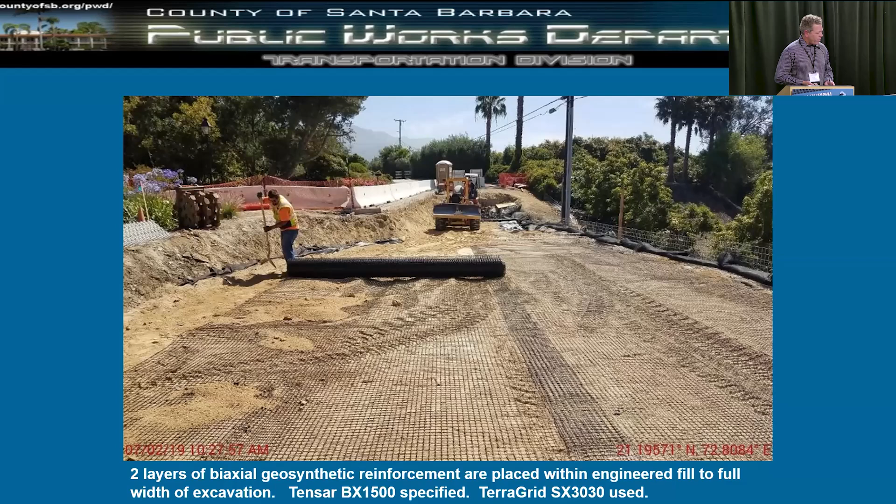Eventually we get to the top, laying out our biaxial geogrid for our roadway section, and putting in our final lift here of the wall and the rock. You can see the rock there as we're bringing that up.

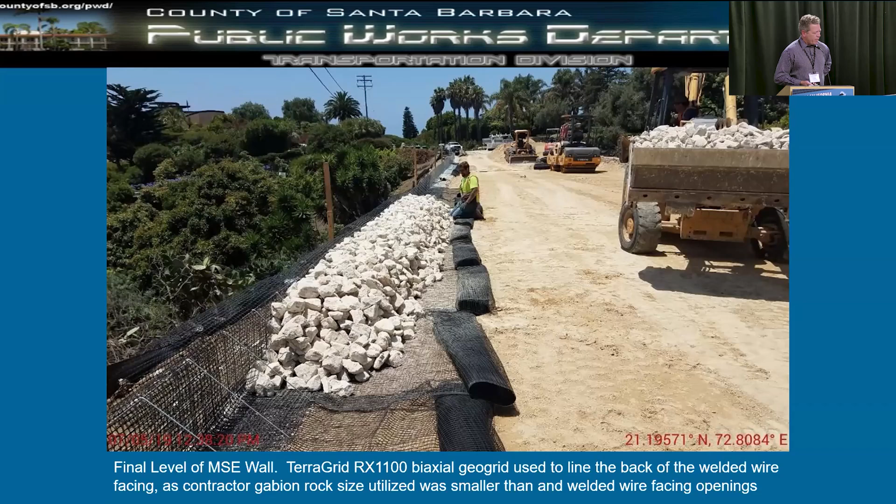I'll go quickly through this because I know I'm out of time. Just a couple photos here showing the overall project scope, and letting you know some of the contract information.

We did get some funding from CalRecycle for this. We were part of a pilot project program, so we received about $100,000 in normal TDA grant funds, and we were able to get about $330,000 of additional pilot project funds in order to build this. So the county was only responsible for about $235,000 of the construction costs.

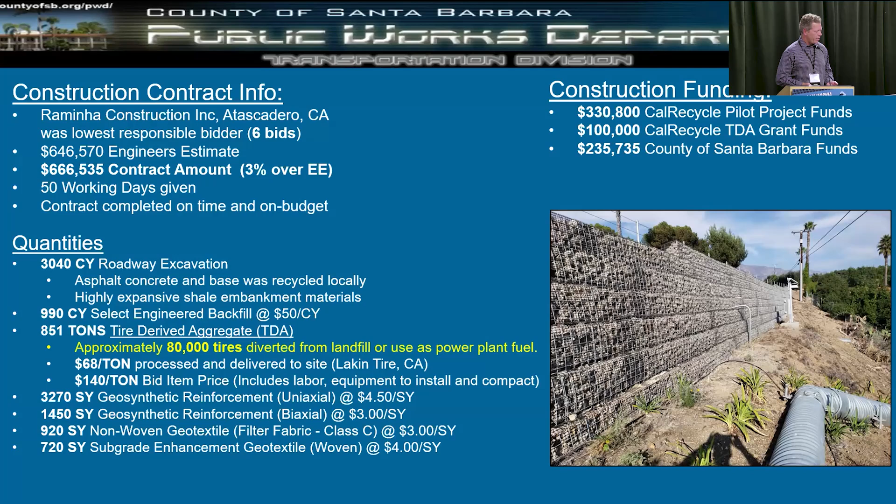We used about 851 tons of TDA, which in approximation is about 80,000 tires. Now, the number I've been hearing today is 60 million tires a year, so in retrospect, not a lot, but for us it felt like quite a big contribution. We were able to get the material for about $68 a ton, but the cost to implement, construct, haul, and everything else was about $140 a ton, which is what the county was charged.

It's got some load cells in it, and some other survey equipment. So they're looking at it as a long-term study project to determine what is the settlement, what is the load in there, what is the heat generation. They're using it to continue to study and put these findings out there for future projects. So with that, thank you very much. Appreciate your time.